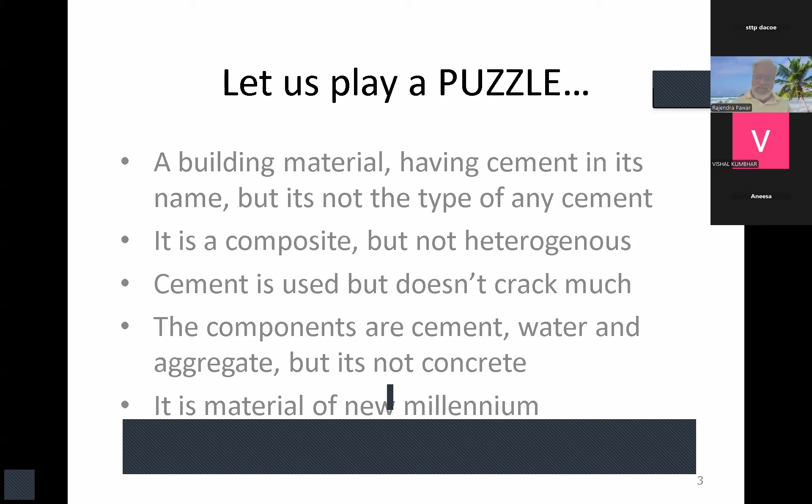The next clue is the components are the same, cement, water, and aggregate, but still it is not a concrete. It's a totally different material than concrete. And of course, this material is now the material of the new millennium, it is said, so the future is in this material. So you must have guessed that it is ferrocement. In fact, the name itself is somewhat misleading. It is not a type of cement, but it is a building material.

Now, in my presentation, I will be covering these topics. We will see first what exactly ferrocement is, its brief introduction, what are its ingredients. Then we will go in detail about the properties and particularly the comparison between the properties of our RCC, which we know well, and the properties and characteristics of this material, and what are the factors governing the designs of such components. Then what are the special features of this ferrocement material? And then with this brief introduction, I'm not going into the design procedures and the details of the other more technical part.

I will be focusing on the general applications. So once you know where it can be applied, then certainly its use will automatically get promoted, and you will come to know how it is more useful than any other building material. So the applications are varied. General applications are, yes, certainly there are major rural applications. Then there is mass scale housing, which is possible by the precasting method using this ferrocement material. Then special structures can be very nicely created using this material.

Then there are different designs and construction techniques like the all-in-one method, which we will try to understand, how it is designed, how it behaves, and how it can be constructed. And lastly, the applications in the public sector, that means in irrigation, in PWD, that means in roads and in canal irrigation structures, everywhere on mass scale, how it can be used economically and very efficiently.

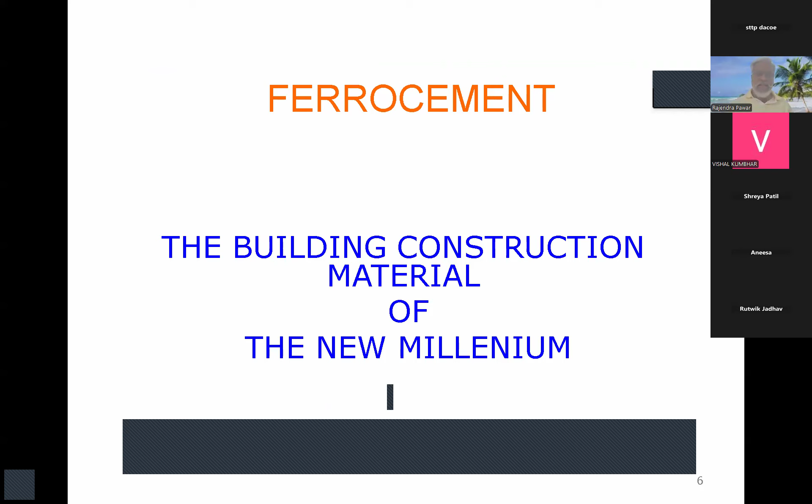Now, what is ferrocement? So, in short, it's a new material, the material of the new millennium, it is said. That means the regular materials we use, the bricks, the wood, the cement, the mud, then the concrete, then many other forms, precasting methods are there. So, apart from all these materials, now this material is gaining popularity, and hence it is used day by day at an increasing scale in the construction industry.

In a nutshell, we will just see what are the features of this ferrocement. Actually, it is not a type of cement. It can be called either ferrocement or ferrocrete. So I think ferrocrete is a proper word, which was coined by our Dr. B.N. Divekar, who is a pioneer in this ferrocement technology. He was a professor in our engineering colleges. Then he resigned, and worked more than 30 years in ferrocement construction, building many big projects in Pune, in Maharashtra, and around India.

And now this technology has so developed in India, particularly in comparison with the other countries in the world, that we are leading in this technology in the world. So, what is this technique? Its technique is similar to reinforced cement concrete, but it is designed using some of its advanced characteristics. You know how the RCC works.

Suppose we take a cross section of a beam, then in the bottom part we put main steel as a member which takes the tension created at the bottom, and the upper part above the axis is taking the compression. So this is how the load is divided into different parts of the section and carried through different materials. And the only strength is in the bond which is created around the periphery of the steel bars by the concrete. So that is the only power we have to design such a member for the given load. So this particular typical characteristic is enhanced in ferrocement. How, we will see later.

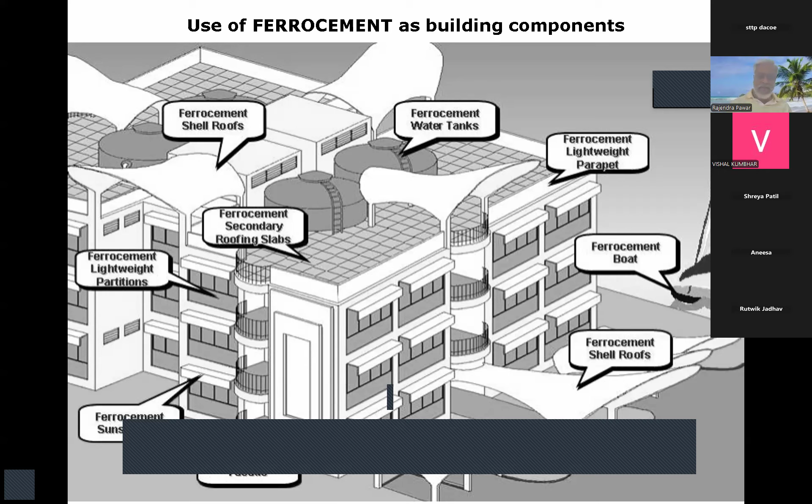Mr. V.D. Joshi from Pune was a pioneer engineer promoting this ferrocement technology, and he first cast ferrocement boats, which are totally unsinkable. You will wonder how they were cast. He made this technology popular. He started constructing these boats in the Pen area near Alibag, and later shifted to Pune and promoted this technology.

See, this is the building. If you want to construct a building of this complicated shape, how difficult it will be to cast using any other material. Think of wood, a fabricated steel structure, even RCC, how difficult it is. But in ferrocement, you can do it very easily and in a very thin section. Even such huge curving walls or roofing slabs can be cast with just 50 mm thickness and without any formwork. That is the beauty of this. We will see how it can be done later. But such beautiful structures can be created using this technology.

What is the material required to form this ferrocement structure? Only 4 basic materials are required: 6 to 8 mm steel bars, which are used as skeletal steel. What is the difference between skeletal steel and structural steel?

I will explain later. The types of meshes can be welded meshes or chicken meshes, which are popularly used, and layers of that on both sides. Then regular ordinary Portland cement and river sand or crushed sand, which is available.

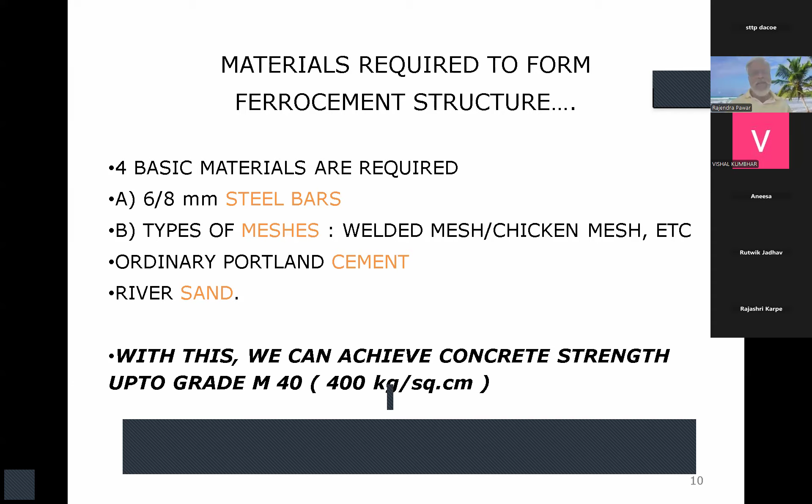With this, we can achieve almost M40 grade concrete having a thin section. And of course, it can take any kind of compression, any kind of tension, certainly more than the limits of standard RCC. Now let us see the materials used for this.

Cement mortar is created, and the water cement ratio is kept very low so that a good quality of mortar can be achieved, and it is simply press filled by hand.

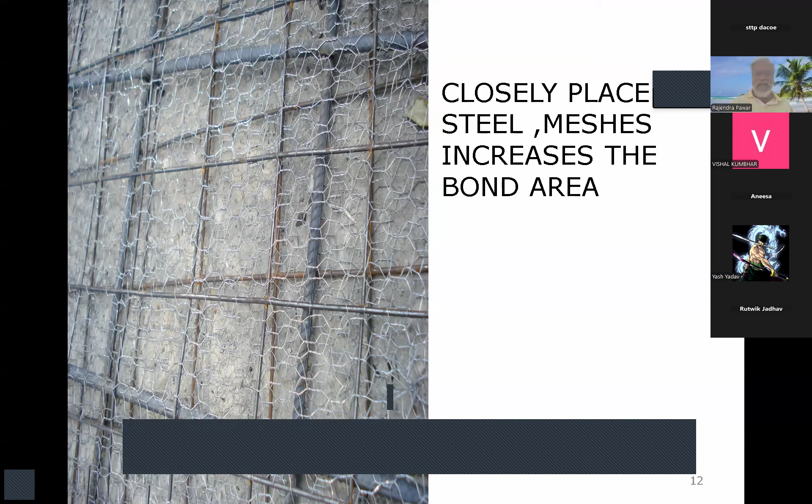This is another picture of closely bound steel and meshes in layers. Depending upon the requirement, we can design it with 2 or 3 layers fitted on both sides of the main skeletal steel and welded meshes. You can clearly see at the bottom the welded meshes other than the skeletal steel.

The load bearing steel is only the welded meshes and chicken meshes, that's all. So the bond area is used only of these meshes and not the skeletal steel, which is only for support.

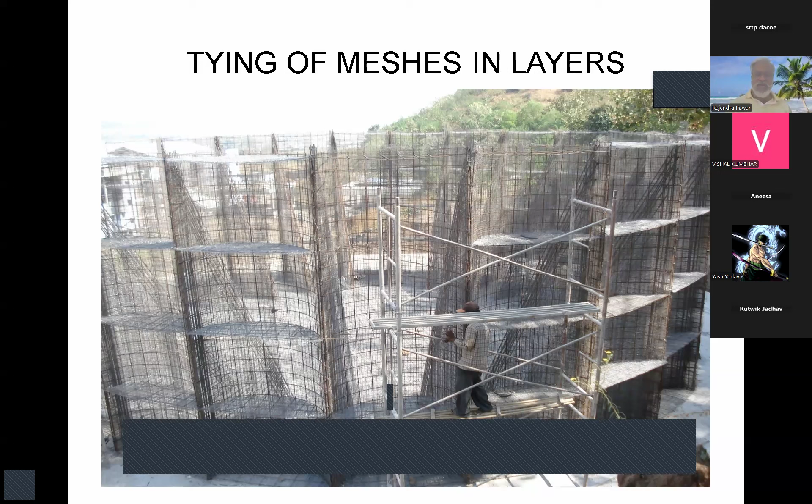Here you can see equal reinforcement is placed in both directions, and this is how it withstands without any formwork. This is another good feature of ferrocement concrete material, that it doesn't require any kind of formwork, no wastage of plywood or wooden or steel planks.

It is directly erected in this fashion using the skeletal steel and cast, or press filled, from both sides of the wall. So this is the way how it is cast.

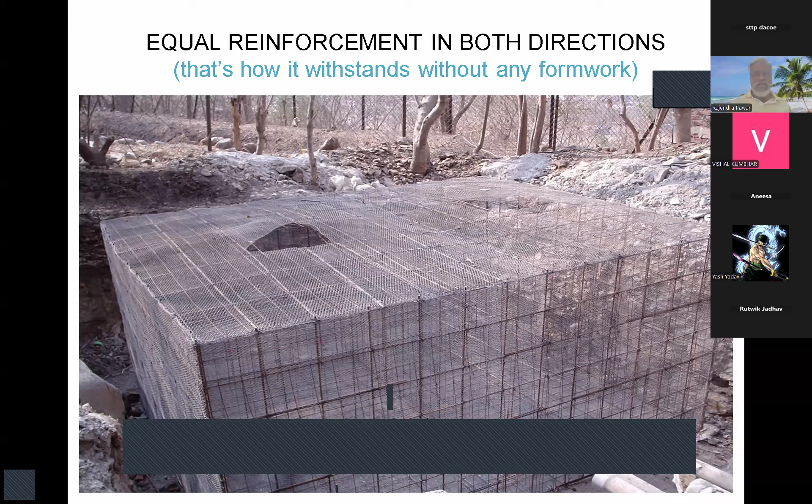You can see this reinforcement binding is in progress. The welding of cages is also done sometimes, and this is how it is pressed from inside as well as from the outside, so a very thin section can be easily cast.

Another thing is why we keep the water cement ratio as low as possible, so that it should sustain this, because with regular concrete we can pour it in a formwork. Here there is no formwork, so if there is a little more water, it will not withstand within the chicken meshes.

So that's why the water cement ratio has to be perfect, and then only it can be press filled and it will withstand in that material. So this is how this material is self quality conscious - we don't need to worry more about the quality because it automatically corrects the water cement ratio, and that's how the material is kept in place.

So this is the kind of press filling method, done for ferrocement. Here the same petals are being casted using this press filling method from inside as well as from outside. At the right bottom corner, you can see half the progress is done and the upper half is yet to be done. Still, you can see no formwork, even no scaffolding is done, except depending upon the requirement to stand the laborers, the arrangement is done. Otherwise, for the structure, no separate arrangement is required.

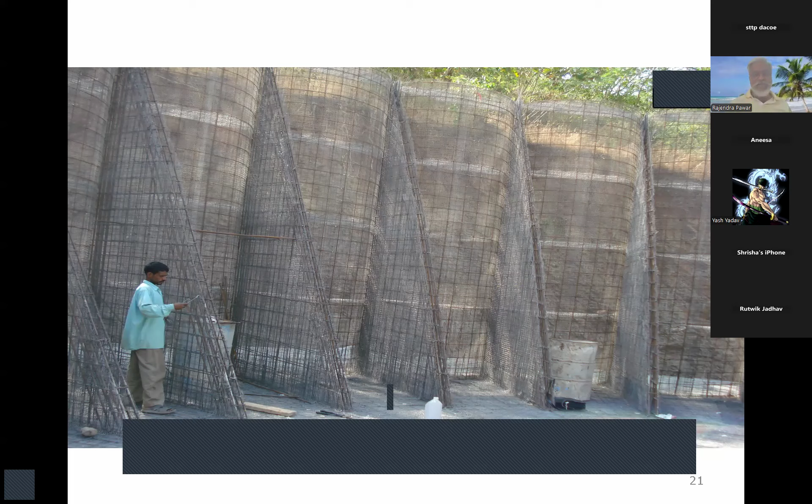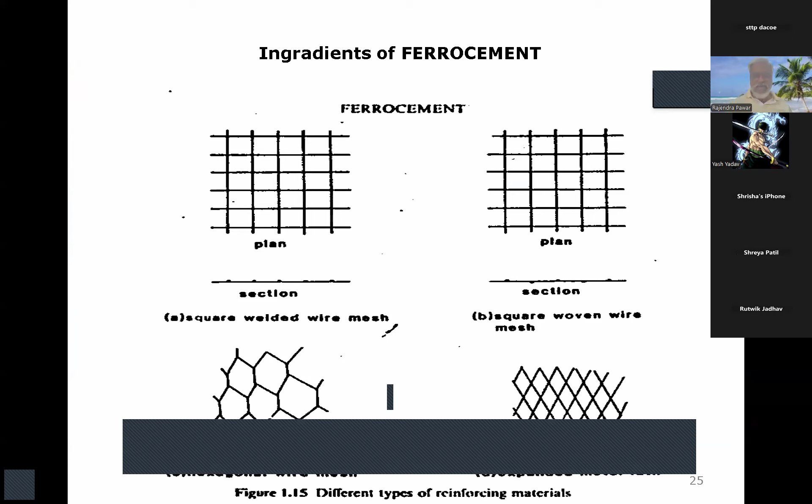Now we'll compare RCC and ferrocement - what are the advantages of this material over RCC? As I already told you, it is not new to us, it's as old as reinforced cement concrete. Though ferrocement material cannot directly replace RCC - I mean, we can construct multi-story buildings in RCC, which is not yet possible in ferrocement technology - it can economically be used at appropriate locations and for specific purposes.

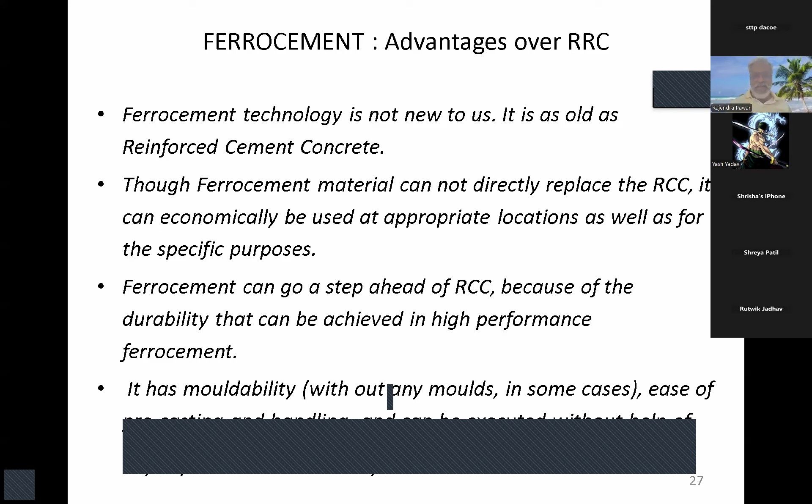So this is the current scenario of this technology. Ferrocement can go a step ahead of RCC because of the durability that can be achieved in high performance ferrocement. And of course, it has moldability, as we have already seen, without any molds in some cases, ease of precasting and handling, and can be executed without help of any skill or technical guidance.

Here is the direct comparison. In RCC, thickness of any component or section shall be minimum 75 to 100 mm - we cannot construct less than this thickness in RCC. Whereas in ferrocement, we can start even from 25 to 30 mm and maximum up to 50 to 60 mm. The matrix here is cement concrete - there is even plum concrete up to 100 or 300 mm boulders used. Here, it's only rich cement mortar without any coarse aggregate.

The reinforcement in RCC is steel bars having diameter more than 6 mm and more spaced apart. But here there is a continuous wire mesh dispersed throughout the surface area of that component in that shape, and that's how it gives strength. The strength can also be achieved through shapes, giving shape to the component, and it saves material cost. The strength to water cement ratio, strength to weight ratio is very low in RCC - here it is very high. For casting, centering and formwork is essential in RCC, due to which honeycombing is possible. Here there is no formwork and centering - the tightly tied wires act as formwork, and hence dense and compact filling is possible.

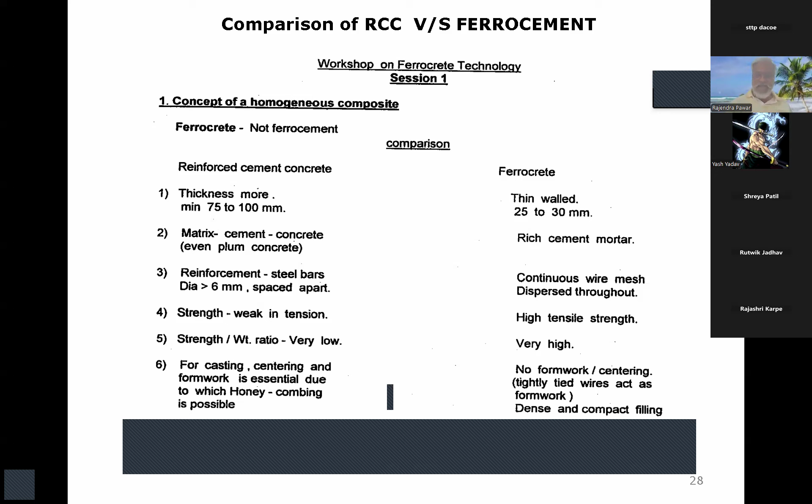So this is how the tensile strength as well as compressive strength is increased in ferrocement, only because of the even distribution of the steel reinforcement.

Some features: it is a thin wall reinforced concrete, constructed using hydraulic cement mortar without coarse aggregate. It has a very high tensile strength to weight ratio and superior cracking behavior compared to conventional reinforced concrete.

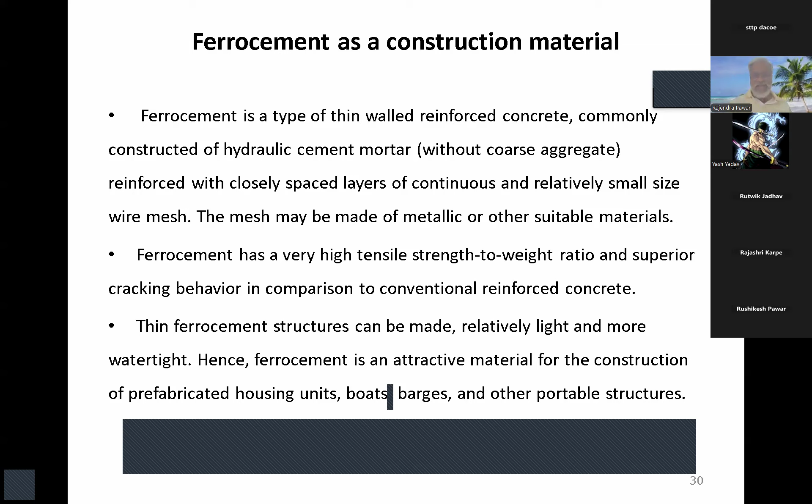Very thin structures can be made. We have seen some pictures - relatively light, more watertight, and of any size and shape. We will see more pictures later when we cover applications.

These are the general advantages of ferrocement. It's very labor intensive, which can provide work to many people, particularly in rural areas, and they can start their own business also using this technology and learning it in just a few days.

It's very economic, with fabrication mainly from locally available material. It has high structural strength, is easy to construct, and easy to transport if precast.

Another point is that it's more seismic proof than RCC. Because the beauty is, when you construct an entire structure like a room or small building in ferrocement,

the homogeneity is more, and that's how the structure as a whole behaves. During earthquakes, it has a little flexibility too because of the thin sections.

The RCC is more rigid than this ferrocement material. That's why beyond the limit it easily gets cracked.

But here, due to the flexibility, even in higher earthquakes it withstands by slight movements, allowing some movement, and the durability is greater. So this is another feature of ferrocement.

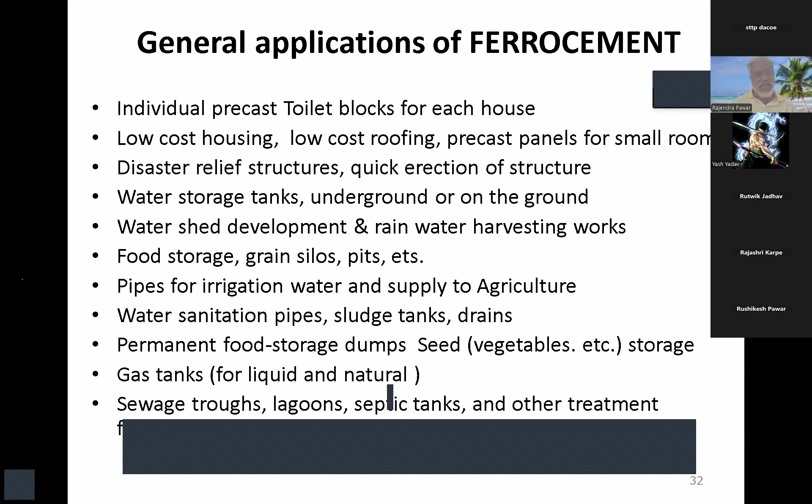Pipes for irrigation water, replacing the canal system, is also possible with this. Or existing canals can be lined with a very thin section of ferrocement, increasing the life of those canals. Many such advantages exist.

We see the actual applications and photographs of this - rainwater guttering, greenhouse components, cattle feeders and water troughs, pavements in villages and even in urban cities. All the pavements alongside roads can be done using precast units.

The telephone and power poles, the signboards, those can be constructed in this. Many such applications are there. Even the use is increasing in the defense area. The bulletproof or even the shell-proof huts or the precast panels can be constructed.

We have tested such kind of components in our MIT at Pune, and successfully we have given this design to the defense area, and they have casted many bunkers, that kind of thing, at the borders. And all these structures are very bulletproof and even shell-proof. So many common applications are there. You can guess or you can even think of.

There are various rural applications, urban applications, the sloping roofs, the domes. The domes are the easiest way to cast in ferrocement technology only. Big domes like 40 feet, 50 feet have been casted in Pune city, to the big atriums having 8 to 10 meters in height, without any formal centering and almost at one-third cost. So this is the beauty of this material if compared with the conventional RCC.

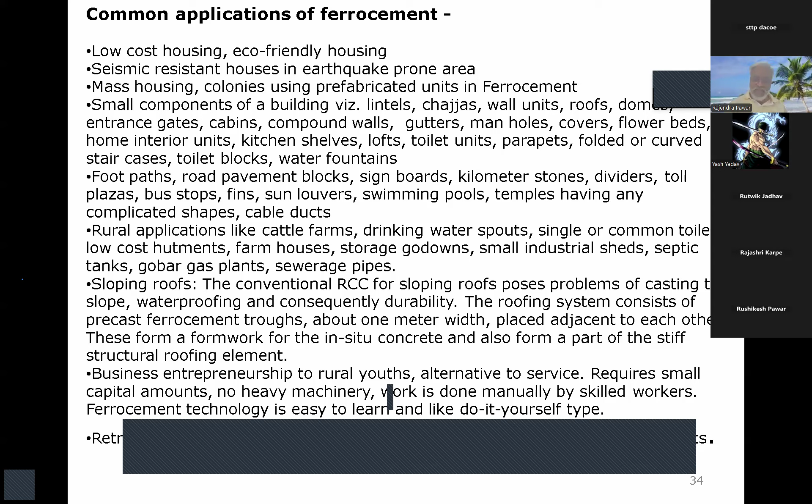The electric poles, signposts, tree guards, biogas plants, barricades, so many applications are there, even in rural areas, where those small components can be casted by the farmers themselves. We can provide some technology to them, some help, and then it is made applicable like this.

So thousands of such tanks have already been casted in the Konkan area. One NGO, Jalvardhini Pratishthan, is working in that area. And those are very useful for small farm holders, for horticulture, and even for other agriculture purposes.

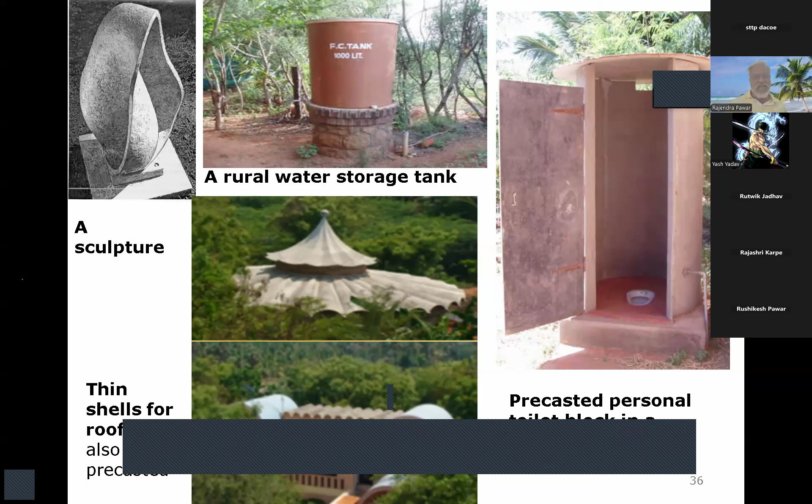Here to the left, a beautiful sculpture is there. So any such intricate shapes, thin shapes can easily be casted in this. And here at the center, you can see the thin shells of roofing, which can also be precasted. Beautiful designs can be created.

So by jacketing it in ferrocement walls, these structures can easily be strengthened and the life can be enhanced using these retrofitting techniques. And for this, the material is unique now for the RC structure. So just name any shape and ferrocement gives it to you.

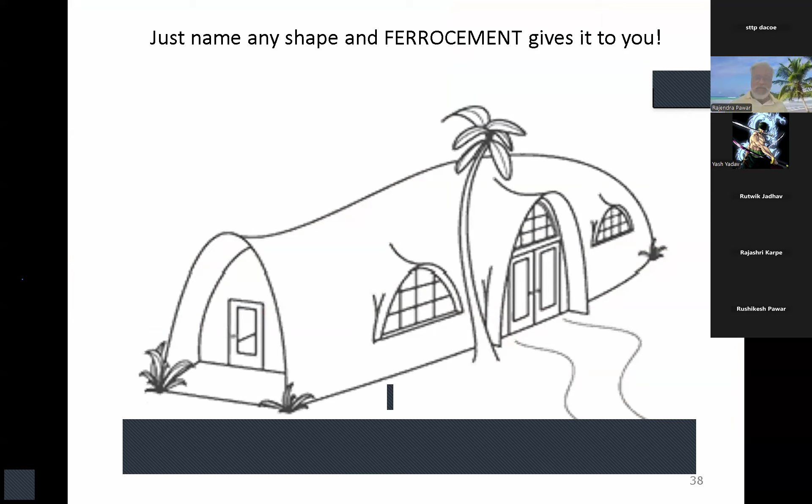I think you understood at least a little bit what kind of material this is, the different characteristics it possesses, and where the applications can be. Some features of these parameters governing the design we will just see in a nutshell.

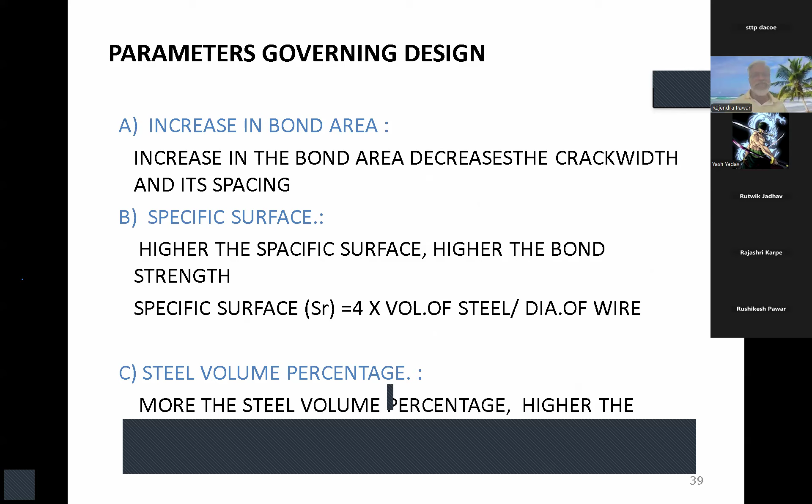Increase in bond area, that's how there is a decrease in the crack width and its spacing. The higher the specific surface, the higher the bond strength. Steel volume percentage is also higher. That's why the tensile strength increases. So these are the parameters which govern the design of these ferrocement structures. The regular post crack stress method and the ultimate stress method are used for designing these ferrocement components.

We have seen the reinforcement pattern is changed, how it is different than the RCC, and hence it changes the structural properties also, and the material becomes more homogeneous when compared with RCC. The bond area increases and its crack resistance. We have seen all these things.

Cement consumption, if you compare, in ferrocement it is certainly more than the RCC. It ranges from 500 to 750 kg per cubic meter, while in RCC it is between 100 to 300 kg. Use of fly ash is advantageous in ferrocement also.

The steel reinforcement is basically wire mesh having 0.5 millimeter to 2.5 millimeter thicknesses with consumption of 350 to 500 kg per cubic meter, while in RCC the diameter is between 6 to 40 mm and the consumption is 90 to 160. The cover to the reinforcement is 2.5 to 5 millimeter in ferrocement. Now, this is another advantage. While in case of RCC, it has to be minimum 12 to 40 millimeter.

No coarse aggregate is used, and the reduction of the dead weight is also another advantage. And even on shallow foundations or the foundations having low bearing capacities, these structures can easily be constructed. Even in Pune, for example, as I mentioned, Dr. Divekar's own bungalow in Pune was a single-storied load-bearing structure built almost 50 years back. Now he has constructed 2 stories above that bungalow, totally in ferrocement, by adding only 1/3 of the weight on each floor. So this is how very innovative designs can be done, and the construction can be done.

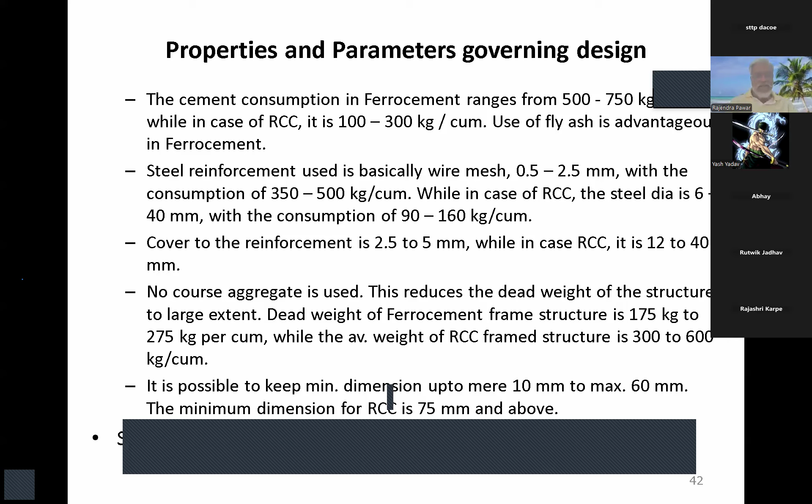It's possible to keep minimum dimensions. That's why we can get any shape, as we have already seen. We will just learn the characteristics of the ferrocement: no timber plank, no formwork. That's how there is saving in cost and saving in time.

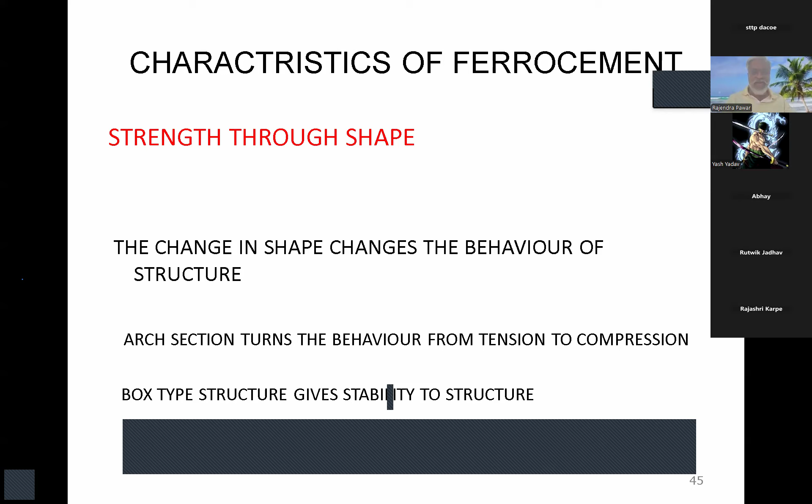The strength through shape can also be achieved, like the plates and shells. We know that's a different part of designing. The arch sections, the arches, turn the behavior from tension to compression. So that facility can also be utilized while designing the ferrocement structures. The box type structures give more stability to the structure. That is all in one method. We will see some slides later.

These are the characteristics which I have already explained. So I think we will go to the application part directly. This is a simple construction technique. Only 4 materials, 3 skills and 3 stages. The stages are regular: the welder for welding, the tier for binding the meshes, and the mason for casting manually by the press filled method. This is a self quality conscious material. I already told you. High strength to weight ratio. So this leads to a lightweight structure.

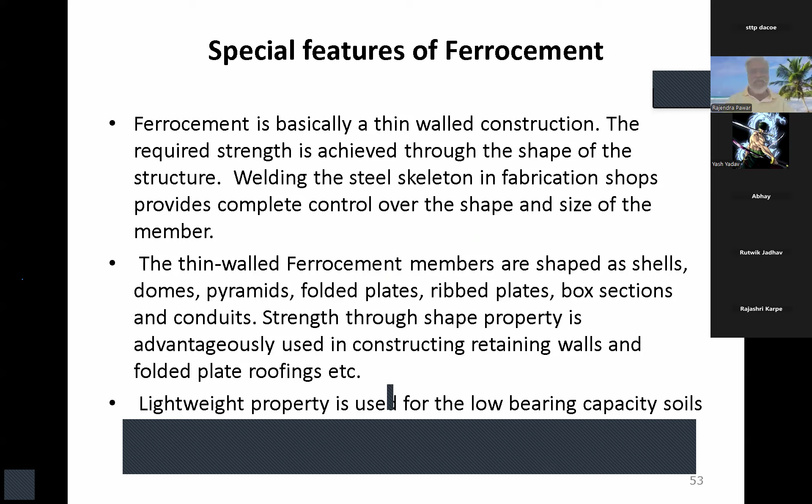Now we will see some special features of ferrocement. The shells, domes, pyramids, folded plates, ribbed plates, all these special members are very difficult to cast in RCC or even using any other material. But ferrocement is the best suitable material for such structures. The other characteristics we have already seen: no centering and formwork is required. Big and costly machinery is also not required.

And this offers liberty to the architects in imagining beautifully shaped structures. See, while thinking of RCC or any other material, there are restrictions or constraints to the architects for giving the different shapes. But here, he gets more liberty for planning. Now we will switch to the applications, and in the given time, we will rush through the various slides so that you can get a better idea.

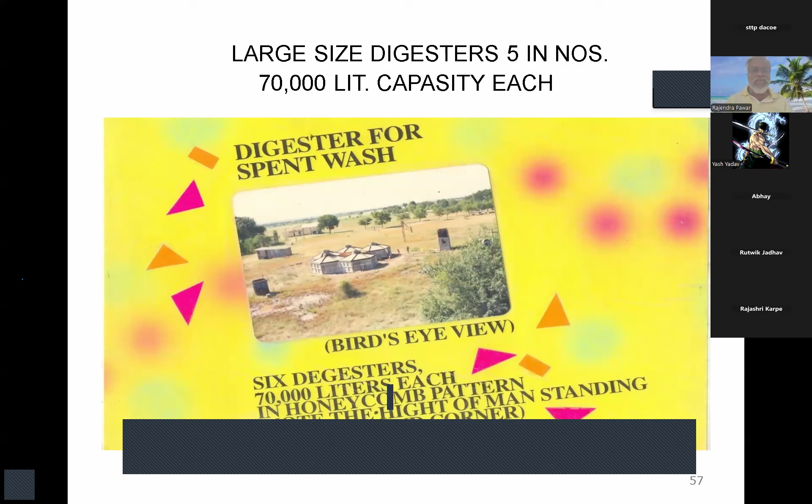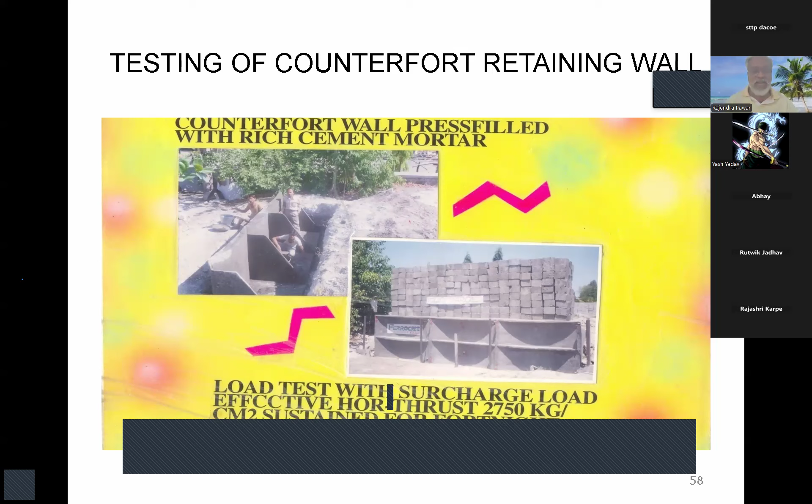The load test is carried out by giving the load almost to 3000 kg per square centimeter by putting the blocks over that. That way side pressure was created and it was successfully passed. So such kind of counterfort retaining walls can easily be constructed at very low cost using ferrocement technology.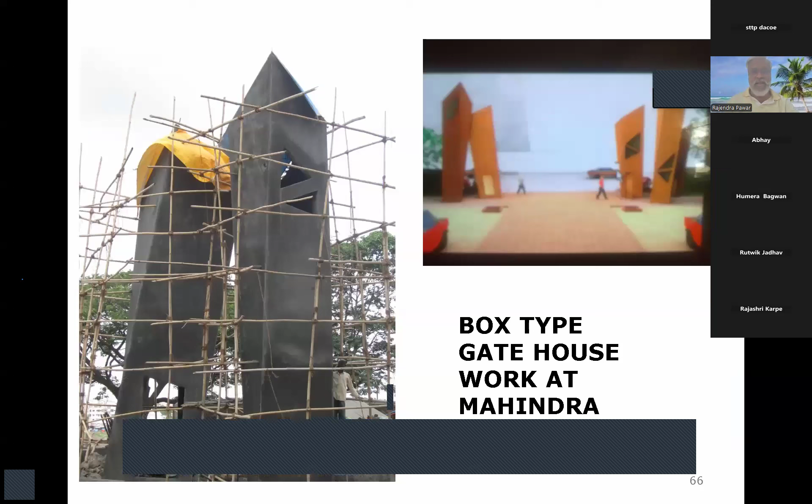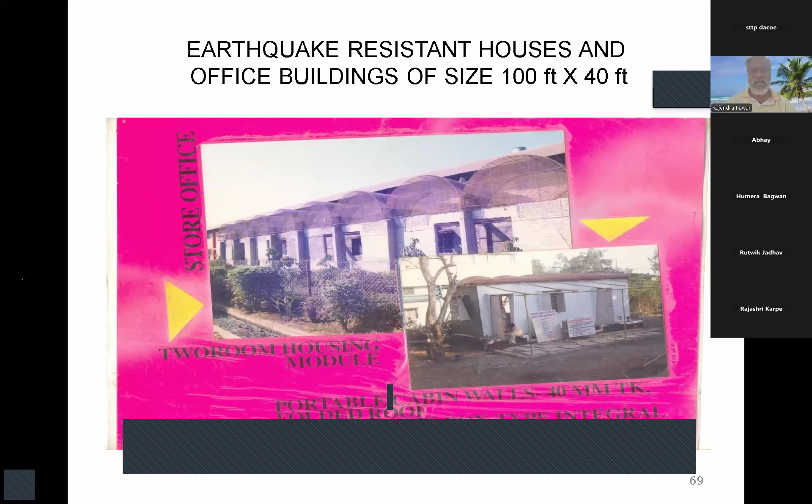Here is a society of earthquake resistant houses and office buildings of size 100 feet by 40 feet. They have been constructed in the Konkan area. These are different constructions. See, the beautiful domes have been cast in Ghaziabad, in North India, where we have visited these sites. Beautiful structures have been cast in ferrocement almost 30 to 40 years back.

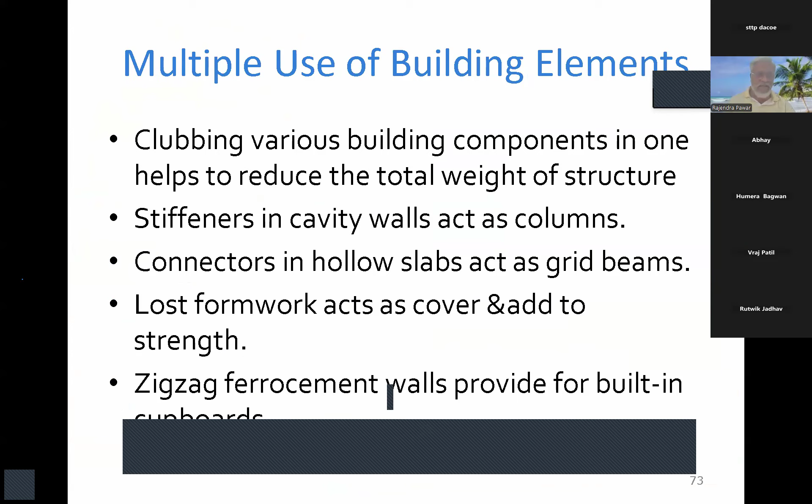Again, these are some multiple uses of building elements. Those elements can be utilized in any RCC building, any high-rise building, or skyscrapers. Shaping a member is also to reduce weight. And these are again the same advantages which we have already discussed.

Now we'll see how this technique can be used for mass scale housing. We need a number of houses as the population is growing and the demand is more. So using the conventional methods, we cannot fulfill the demands due to the time consuming methods, the labor intensive works, and maximum site work. The solution can be precasting, erecting, and joining at site. But again, while precasting in RCC or prestressed concrete, the problems are heavy weight and the jointing at site.

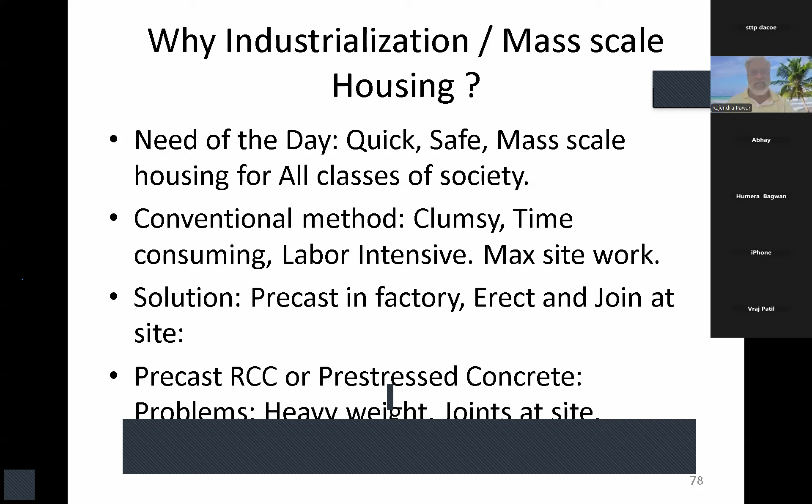So, to overcome this, the same thing can be done in ferrocement components, and we can increase the speed of erection of the houses, and that's how mass housing can be possible in minimum time and with lesser costs. So, these are some advantages. We have already discussed all these.

There is another advantage of this ferrocement element as lost form. In RCC, if you want to cast a long beam kind of structure or even the column, we create a formwork of plywood or steel plates, then we pour concrete in that and we remove the plates. Here, the same plates can be cast in ferrocement and regular RCC is cast, and then the formwork is left as it is as a lost form.

So that will become a component of that member, a composite material, the outer side ferrocement material, and the inner side regular RCC. So these kind of structures can also be cast in multi-story buildings and high-rise buildings.

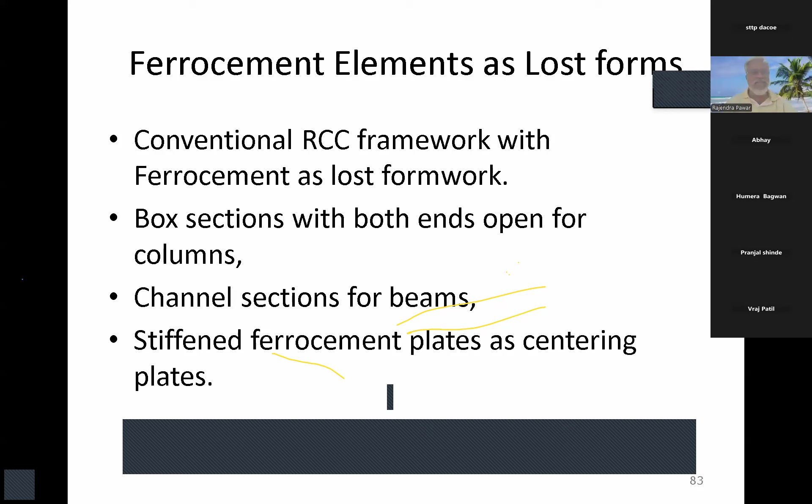Now we will see various applications. There can be applications in almost various areas and sectors. Water retaining structures, as I told you it is a very good waterproof material. Soil retaining structures also, space structures, special feature structures, elevation treatments, and of course precasting. Now in water retaining structures, these are the various applications. We will see the pictures of that.

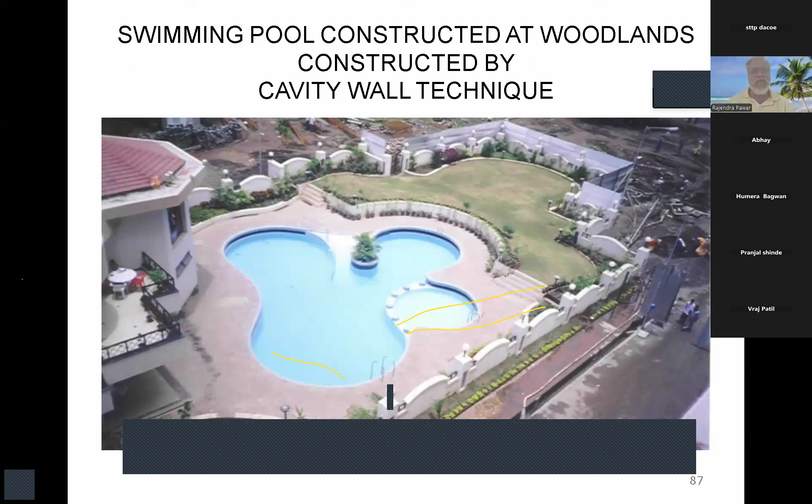A beautiful swimming pool cast in Woodlands, which is at Lonavala. Here at Mahindra Royale, some swimming pools in Pune residential societies. A big water tank of 12 lakh liters capacity, which is at Talegaon. The pictures we have already seen. The soil retaining structures, we have seen the retaining structure having almost 6 meters in height.

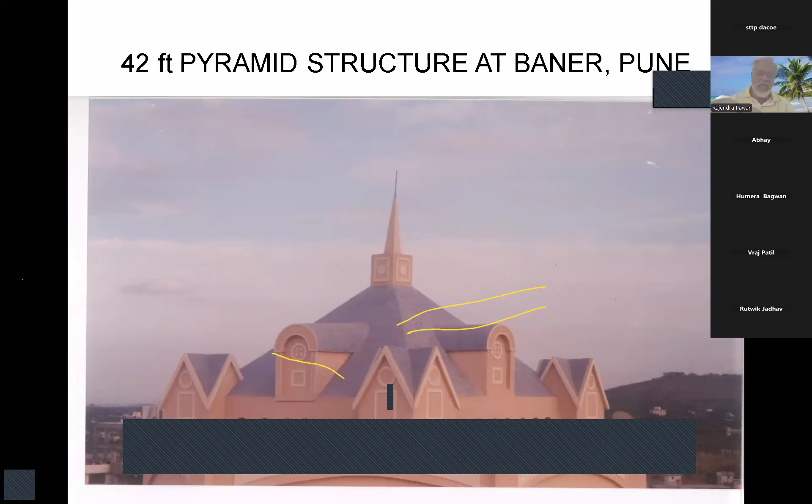And these space structures like domes, shells, and pyramids can easily be constructed. See, these beautiful shapes can be achieved in ferrocement. The building is an RCC high-rise building, but the rooftop is beautifully decorated using these ferrocement elements.

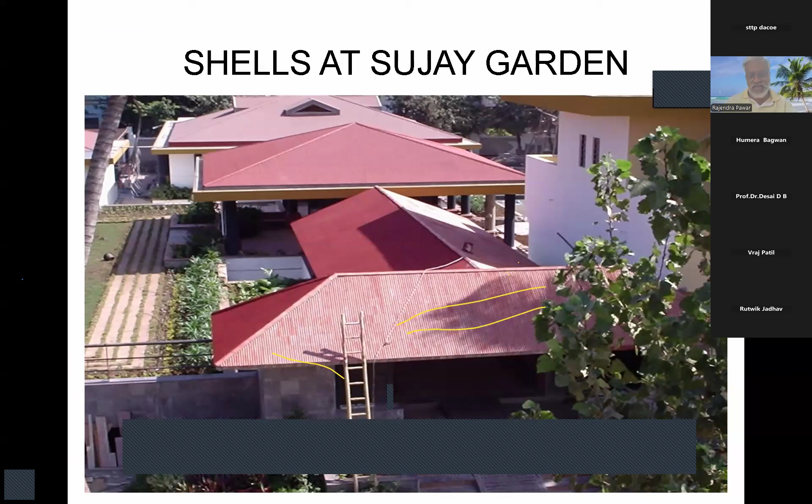Here in Kothrud area, there is one society and a big Nala passes through the society. You can see the residential buildings to the sides. This Nala was assessed, the discharge was calculated, and the in situ pipe of different shape, not circular, a conduit you can say, having a length of 700 feet and the diameter almost 12 foot, the maximum diameter.

It was casted and kept in place, and the land was made to the other uses like gardening and other things, and the Nala was confined and passed through this in situ conduit. So this structure solved the typical problem of that Nala, the flooding and waterlogging problems in that residential area.

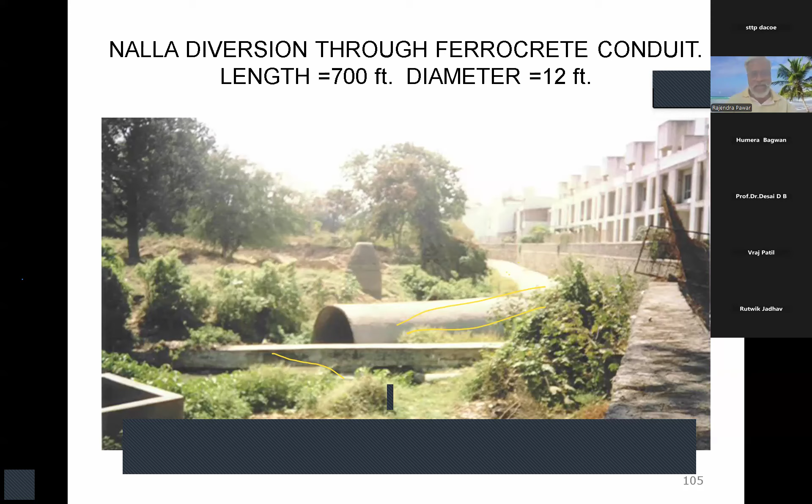I told you about Mr. Joshi, who started this technology by constructing the boats. Such kind of catamarans are still in use, cast almost 40, 50 years before, and they are still floating. These are totally unsinkable, and you can see the material itself is watertight. That's how its durability gets increased.

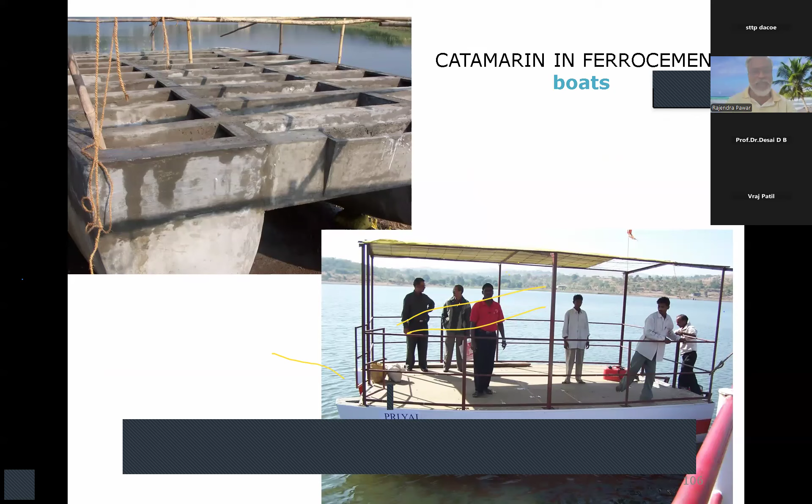Here, the various applications: you can see the elevation treatments can be given even to the tall buildings, the fascias, hollow columns, hollow beams, the pergolas, the arches, waterfalls. So any architectural features can easily be done in this ferrocement.

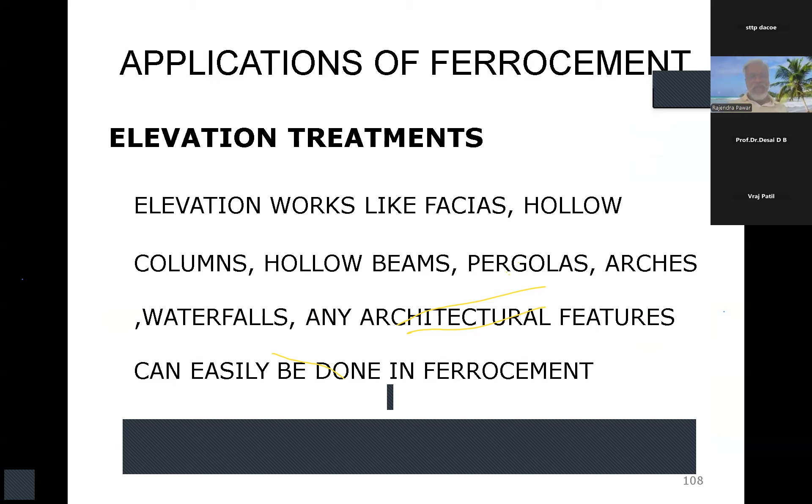See the beautiful roofs, the fascias, the columns at the entrance of a big resort. This entire structure is casted in ferrocement. The columns are hollow columns having a thickness of only 2 inches.

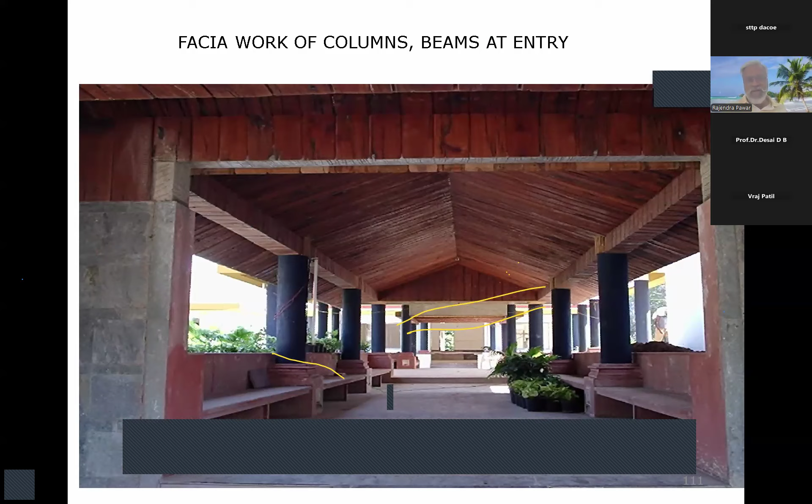Now we can see the special features, how those can be casted using ferrocement. The special features, the structures like unconventional structures. We have seen the Nala diversion project, the large size silos, different shapes of watchman cabins, containers. Garden features and furniture are also possible in this technology.

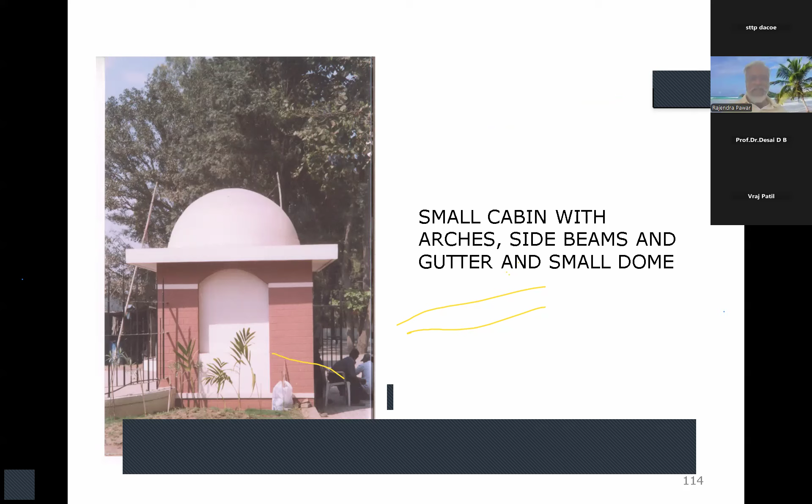This is a beautiful small cabin having arches, side beams, gutters, and a small dome, casted in Ahmedabad almost 50 years before. This is the first structure for testing purposes. As a model, it was casted there for the promotion of this technology, and it is still in a beautiful condition.

Can you cast such kind of ball in RCC very nicely and smoothly? Think how the reinforcement would have been placed, or how it had been casted, and think of casting this in RCC as well as in ferrocement. Can anybody guess how the steel reinforcement would have been placed inside this?

Anybody from students? Hello? Yes, sir. Can anybody tell how the reinforcement in this ball would have been placed, if you want to cast in RCC or in ferrocement? Peripheral. Peripheral reinforcement. Okay. And now we will see the actual casting, how it is done.

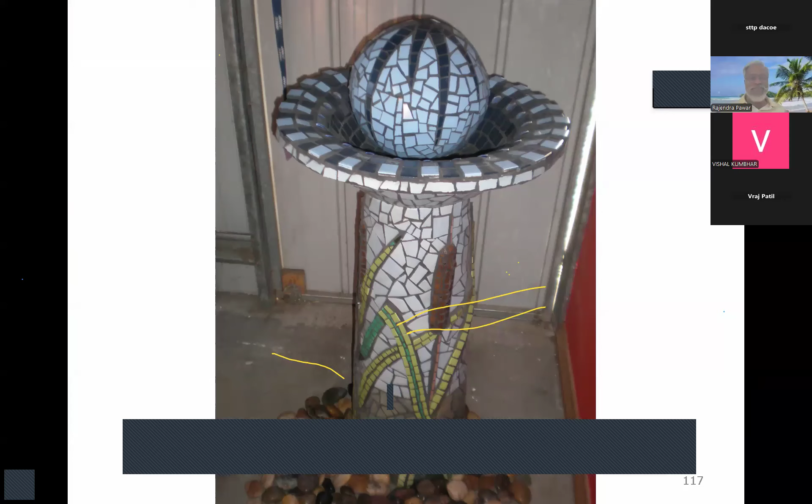Only a mesh covered up onto a football. Right, pure football. Exactly. So very easily this can be casted. And such beautiful steps, these flower pots, the balls, again decorated by pieces of tiles. So such innovative structures can be casted in ferrocement.

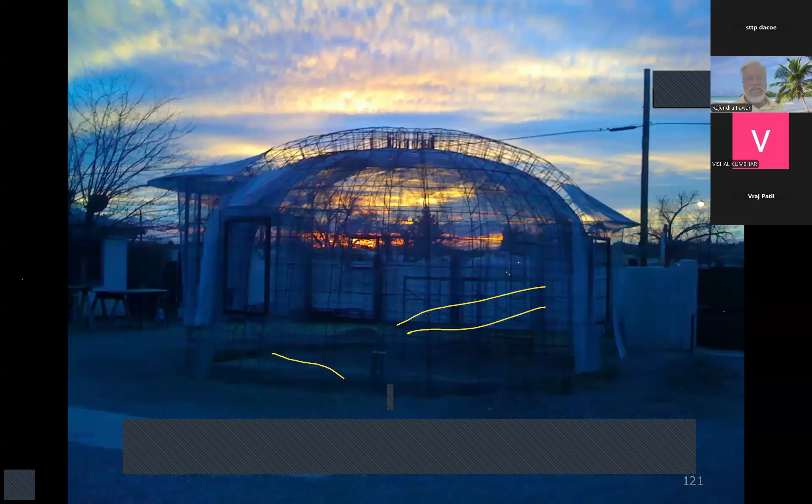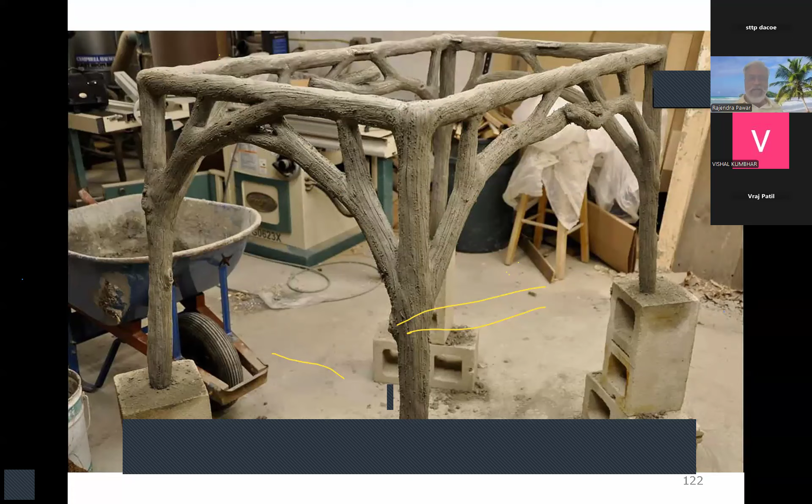This is the skeleton of the same table which you have seen in the previous slides. Beautiful garden furniture can also be created using this technology, which is of course durable, strong, everlasting, and with minimum cost.

Such structures can also be cast. A beautiful dome, almost you can see that 31 cubic foot of cement mortar is used. The welded mesh layers are given from both the sides. It's expanded metal lath which is used for this structure.

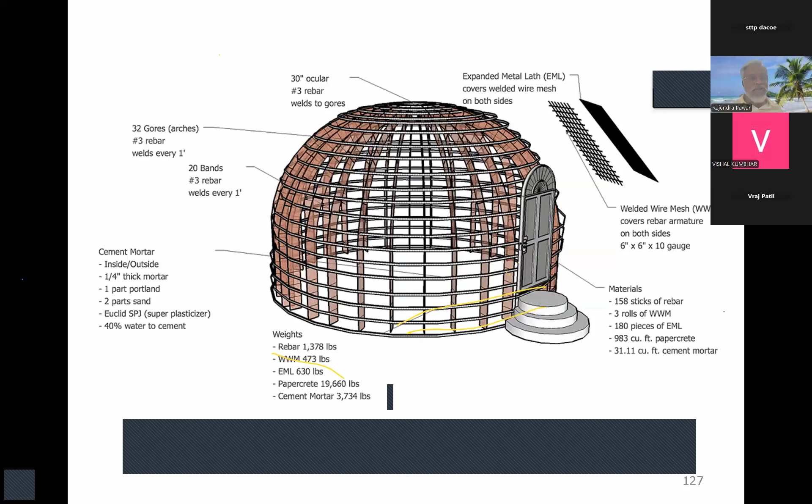The arch form is given so that the entire structure is in compression, and that's how the requirement of steel as well as concrete is reduced, and a sturdy structure has been designed and then cast. It was a 40% water to cement ratio, and it is only 1/4 inch thick mortar used for this dome.

This is another picture. Now we will see a different kind of construction method, which is designed and patented by Dr. B.N. Divekar, the all-in-one method. Let's try to understand the design concept of this all-in-one method of construction. In conventional methods, many activities are involved.

We can see the RCC framework for the footings, columns, beams, slabs. First, we have to prepare the formwork, then provide steel reinforcement, then pour concrete, and then de-shuttering of formwork. While doing brickwork, we have to do handling and stacking of bricks, the line out for brickwork, then providing brickwork, constructing, and then providing window sills and other things.

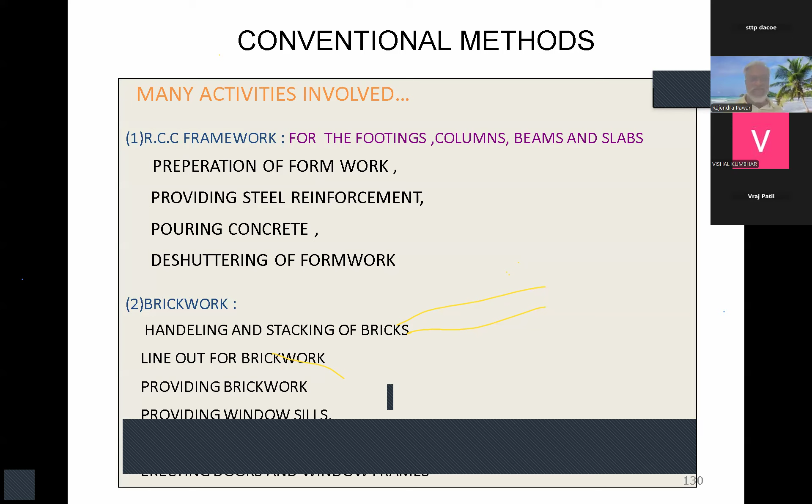Then we have to do finishing, the plastering from inside and outside. Different materials are used like brick, steel framework of doors and windows, plaster, mortar, RCC and concrete. And to all these, the waterproofing in case of the roofs, the preparation of base, then laying of tukda bricks, the koba we call it, applying cement mortar over it, and the finishing of top surface. So all these processes need to be done in conventional methods while casting in RCC.

Now here is the process involved in the all-in-one method of ferrocement construction. Divide the walls in panels and slabs in various boxes. The design of slab and design of wall is exactly the same. There is no difference. The small panels are created in form of boxes, say 1 to 1.5 meter square boxes, and erection of fabricated walls and slabs at site.

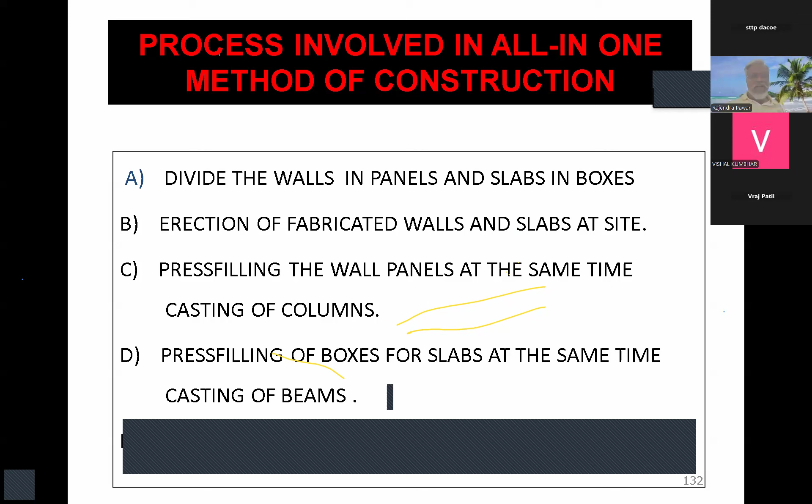Then we have to press fill these wall panels, at the same time casting the columns. The columns are built in, so those are not visible here. The same is the case with roofs, where the beams are hidden. Those are also built in and cast at the same time as the slabs. So this is how it is used in the all-in-one method.

If you compare the basic difference, in RCC, the framework comes first and filler walls later. We erect the RCC framework first, columns and beams and slabs, and then we construct the divide walls as filler walls later. As different materials are used, the construction is heterogeneous. So that's how it gets cracked between the surface of any column or beam and the brick wall, because of the difference in material.

It's certainly heavy in weight, uneven load distribution, all work needs to be done at site, and it's time consuming. If you compare here, the process is completely reversed. The same material is used for construction of walls, floors, and framework. In a nutshell, it is light in weight. The load is uniformly distributed. The site work gets reduced by at least 10%, and it's certainly a time and cost saving process.

Now, how is it done? We will see some differences first. In RCC again, we need special design for earthquake resistance, it is restricted to buildings only, with maximum pollution and maximum use of natural resources. Here it is eliminated. The system itself is ideal for earthquake resistance because of this box action. It is more durable and sturdy, suitable for all branches of civil engineering, and it is 100% eco-friendly since there is no use of any wood or other natural material.

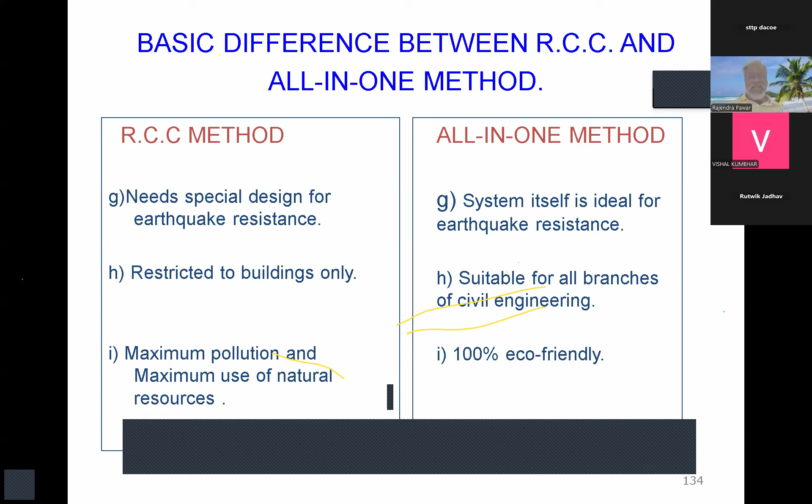This is how it is designed. This is a wall panel. It's a cavity wall, and the different panels have been designed. In each panel, these are the hidden columns and beams in the same panel. Those are cast along with the wall panels.

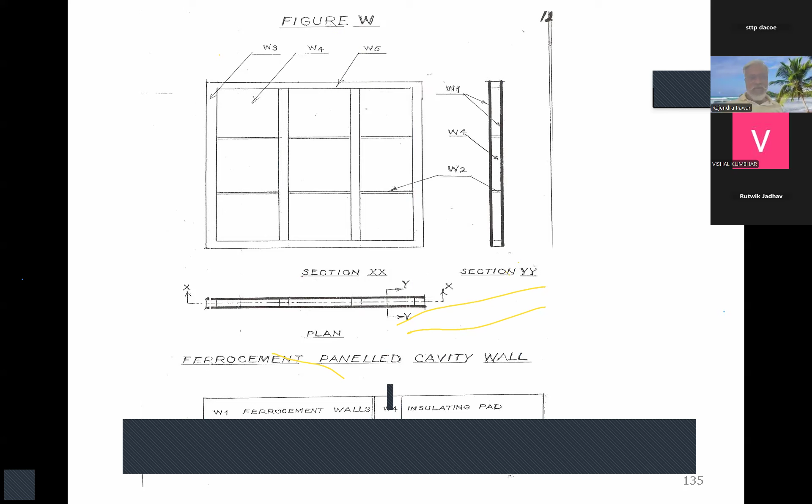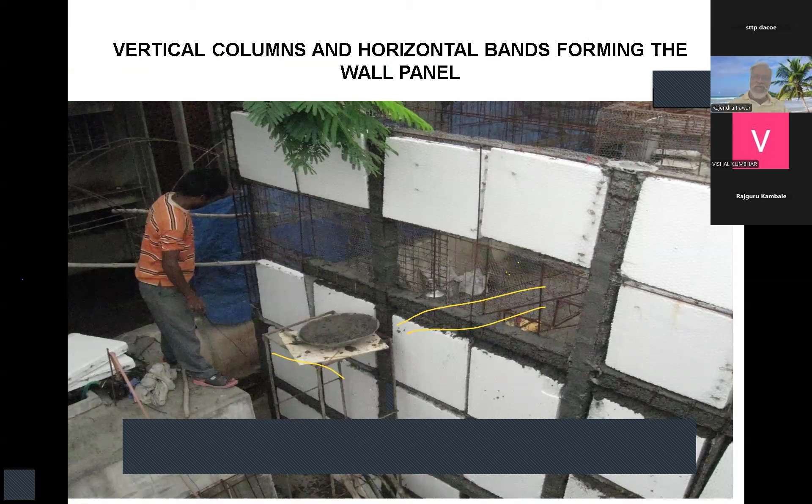The casting is started from the top. Once you erect all the skeletal and steel structure for any building, the casting is done from the top, and then the walls are finished.

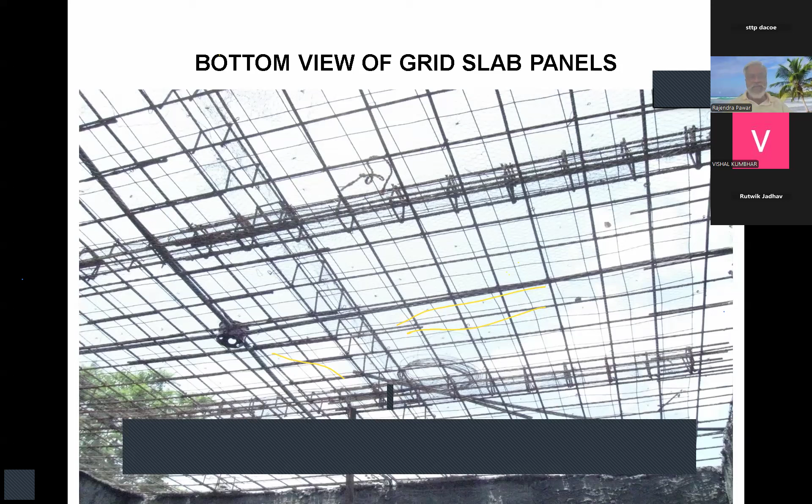This is the bottom view of the same grid. Here you can see the structural steel, the wire meshes, and the hidden beams, which are placed and then cast simultaneously. Here these beams have been casted, and beyond, immediately followed by the slab which is press filled using hands. This is the casting of slab panels from the top, and then you can do the waterproofing layer above this, and the slab is finished.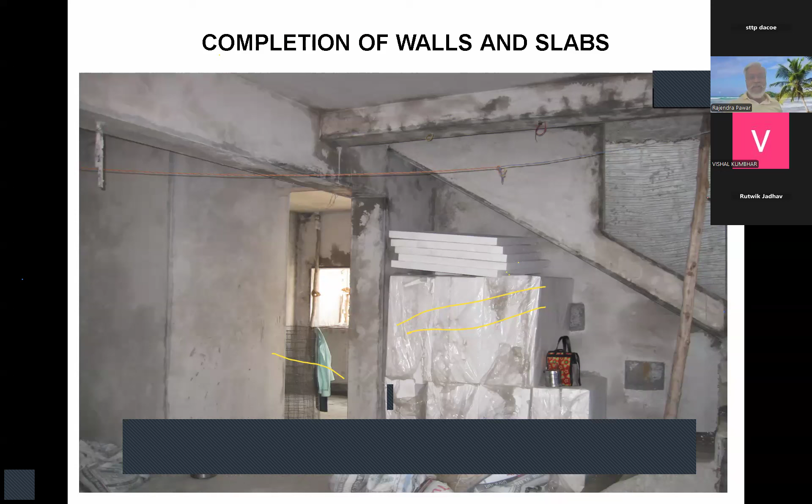Some salient features of this all-in-one method: the load distribution is throughout the body of the structure due to paneling, boxing, and 3D framework. The members like columns, beams, and walls are reduced and built in, giving more homogeneity. The integral casting structure acts as a single unit, as a box, which enhances load carrying capacity.

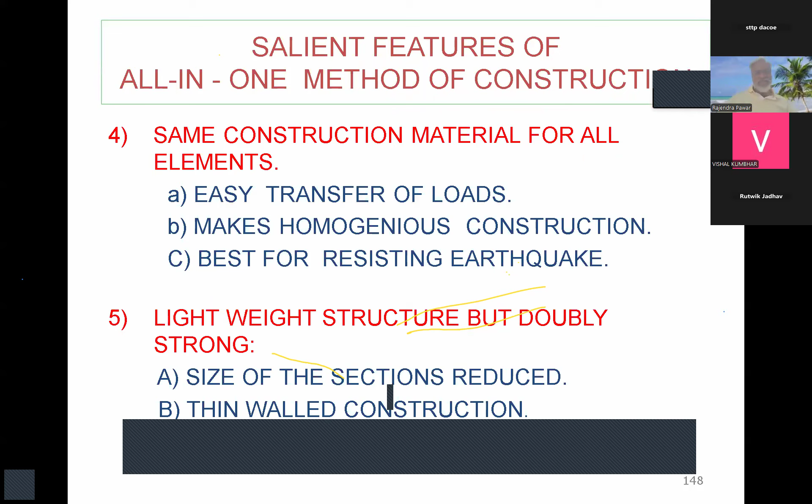Same construction material is used for all elements. There is no difference, no brick work or wood work is required. Everywhere only cement mortar and wire meshes are used, which is very easy to procure and cast. There are many such other advantages.

Now, in a few minutes, we will see how these applications can be done in the public sector on a mass scale. Government departments like water resources, rural development, agriculture, water supply, and public works departments can make use of this technology for their various structures and directly replace RCC with this technology. Many intricate and novel designs or shapes can easily be constructed, and on mass scale, there is a huge cost reduction and also possibility of precasting, so we can increase the speed of construction.

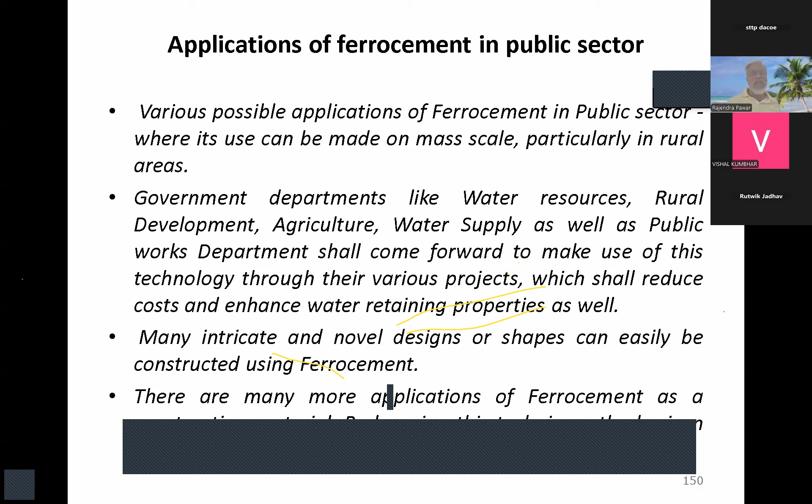In the water resource department, waterproofing is the basic requirement. So leakages through the body of dams and canals, the seepages, can be tapped or stopped by using this technology as retrofitting. The ornamental and attractive shapes for dam entrance gates and various cabins on dam tops can be used. Small Kolhapur type bandharas and retaining walls can also be constructed here.

The canal lengths run into thousands of kilometers. Precast cement panels can be used for lining such canals, saving huge amounts of water. For small field channels, precast trapezoidal gutters of small lengths can be made portable, and even for drains, this technology can be used on a mass scale with reduction in costs.

This is the ferrocement lining done for a swimming pool. The tank size was almost 40 by 20 feet, and the depth was almost 6 feet 9 inches. The location is near Lonavala.

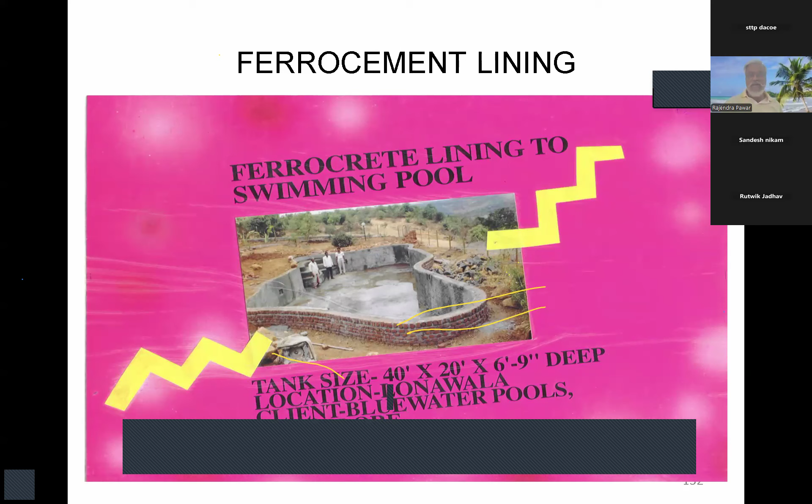This is one ferrocement application I did as a pilot project in the water resource department when I was at Buldana. This is a pump house building for a huge lift irrigation scheme. The pump house size is almost 20 by 8 meters, and the roof is 9 meters high, because girders and a gantry are required to lift the big turbines and pumps for maintenance and repair work. So this height is required.

The structure was erected in RCC and only the roof remained. So I replaced that roof. There was a discussion on whether to do a slab for this 20 by 8 meter size at 9 meter height, or just cover it with a steel framework fabrication. I replaced that with a semicircular ferrocement roof, a design I constructed there, at just one-third of the cost estimated for the RCC work.

Later we made improvements, and instead of a single semicircular arch in one direction, multiple arches were designed for another pump house, giving further savings in cost and increased speed of construction. This was done way back in 2011, so now almost 12 years have passed, and the structure is still standing beautifully.

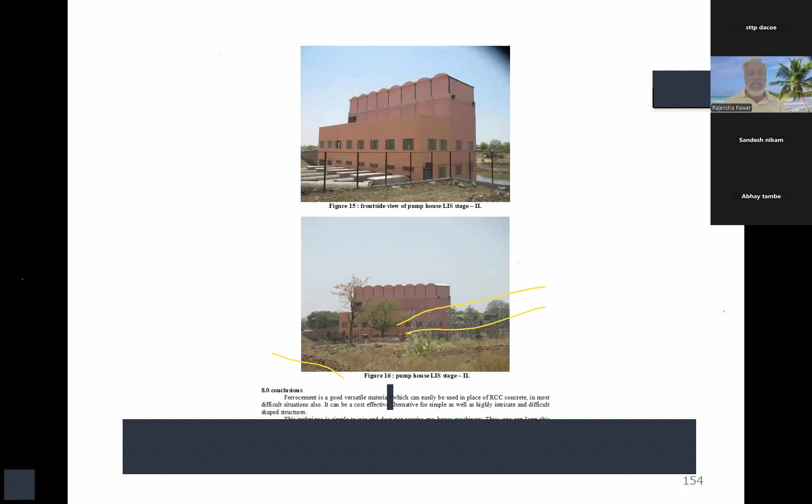Here, the single small curvature segment skeleton is bound on the banks and those are put together. Just a foundation is prepared, and the segments are nut-bolted to the foundation, simply press-filled on site, and within 2 to 3 days this bandara can be completed. This one was almost 60 to 70 meters in length, 1.5 meters in height, and cost less than 1 lakh, where a traditional RCC bandara costs around 8 to 10 lakhs. This design is very beautiful and very popular in the Marathwada region for cement bandaras.

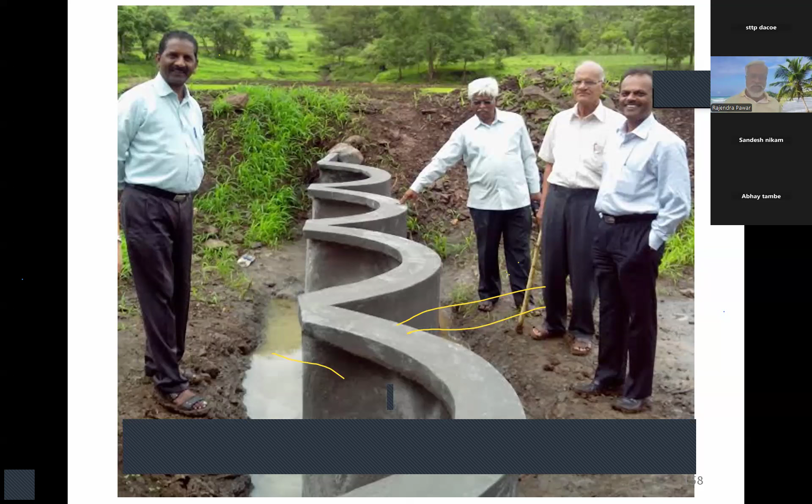Such a chain of bandaras can be cast on any stream or big nala, where we can store water and let it seep to recharge the groundwater, for water conservation purposes.

In public works departments, you can see many such applications. I will not read all these details, but you can understand and think of the various applications there are in ferrocement.

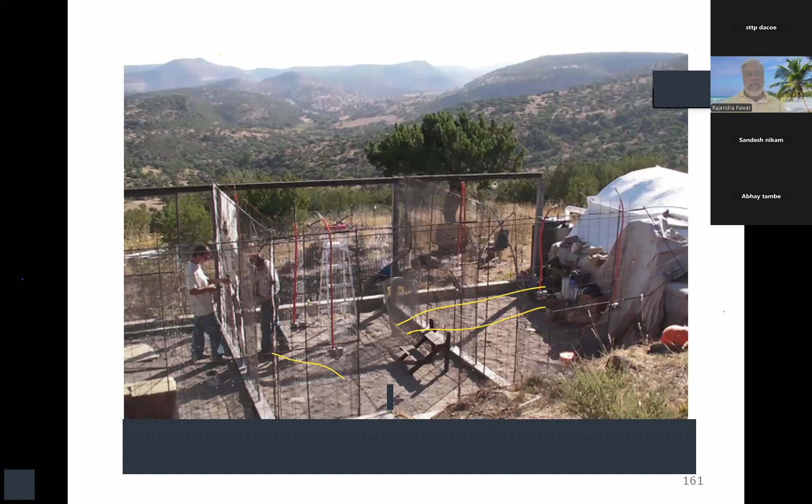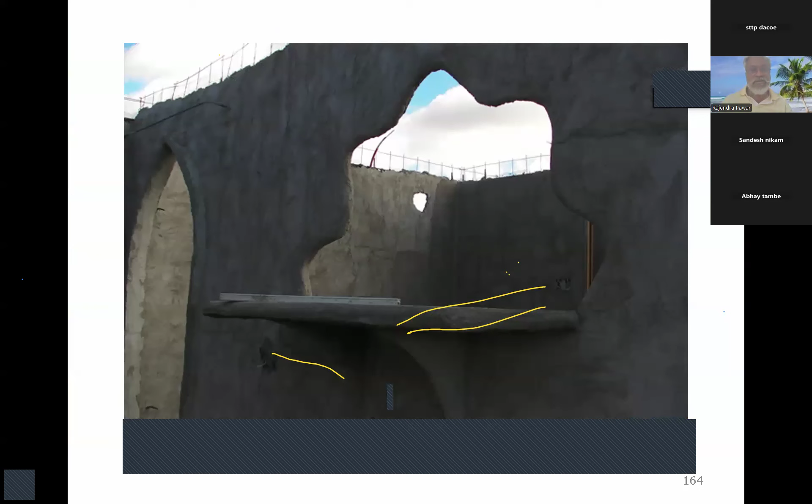Some snaps of the same house, where ready-made doors and windows can also be easily cast and joined with the ferrocement walls along with all fixtures. Electrification, if wanted as concealed wiring, is also possible through ferrocement walls.

This is a hut cast for defense purposes in border areas, which is bulletproof and also shell-proof, even though the thickness here is not more than 2 inches.

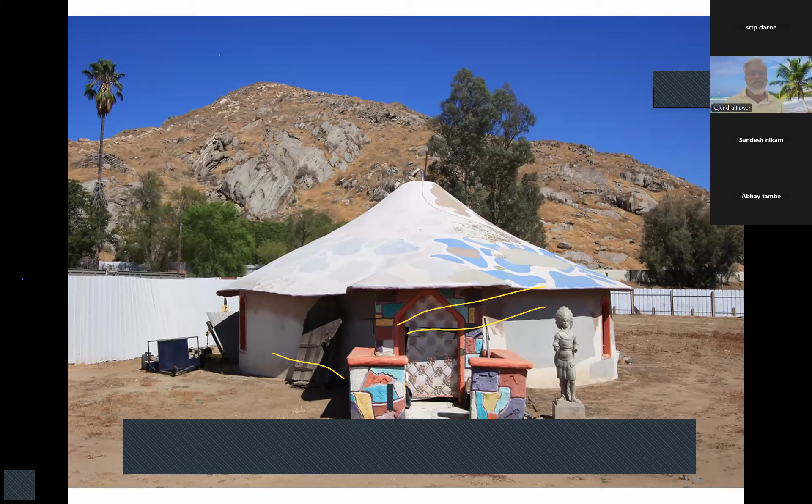These are big industrial buildings cast in ferrocement, some big halls and resorts. Beautiful resorts have been cast using this in Mahabaleshwar and Lonavala areas. Here is a curved wall which is cast over there.

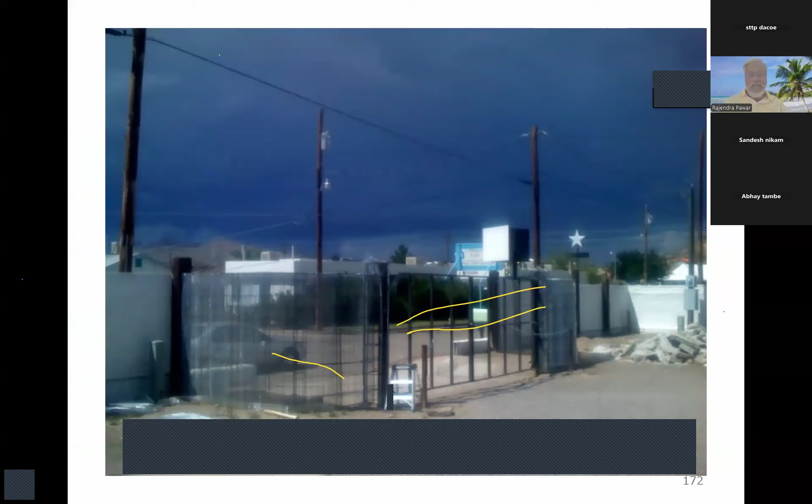The industrial applications - so I think by seeing all these various applications,

You could easily understand the different kind of properties which it possesses as compared to RCC or any other building material. This subject as an elective subject has already been accepted by the University of Pune and even some other universities in Maharashtra, for BE Civil students as well as for post-graduation. Many students are also doing PhDs in this technology.

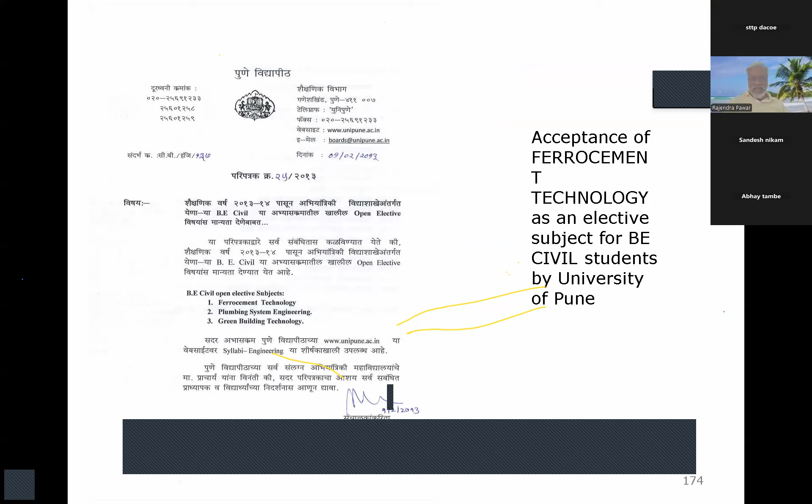This is the circular of Pune University way back in 2013. This subject is being taught and students are interested to learn this not only for academic purpose, but after graduation, certainly for seeking business in this as an entrepreneur. You can work in rural areas, work in urban areas, make these applications, and also develop more innovative ideas by using this technology for various applications.

This was the proposed syllabus for this ferrocement technology. Various international experts who worked in this ferrocement are also there; they have visited our sites in India. Here we have formed one Ferrocement Society of India, which is an NGO, a trust, only for the promotion of this technology. No commercial works are being executed.

We organize various national and international seminars, workshops in engineering colleges, in various halls for the practicing architects, builders, engineers, and recently we have presented our cases in the international conferences of ferrocement, which are held after every 3 years. In 2018, I got the opportunity to attend such international conference in Brazil.

I was invited as a keynote speaker to present before them the ferrocement activities of the development of this technology, particularly in India. And of course, there I got to know that we are leading in this technology worldwide, and there is no limit for the development and doing any kind of business or any kind of structure construction using this.

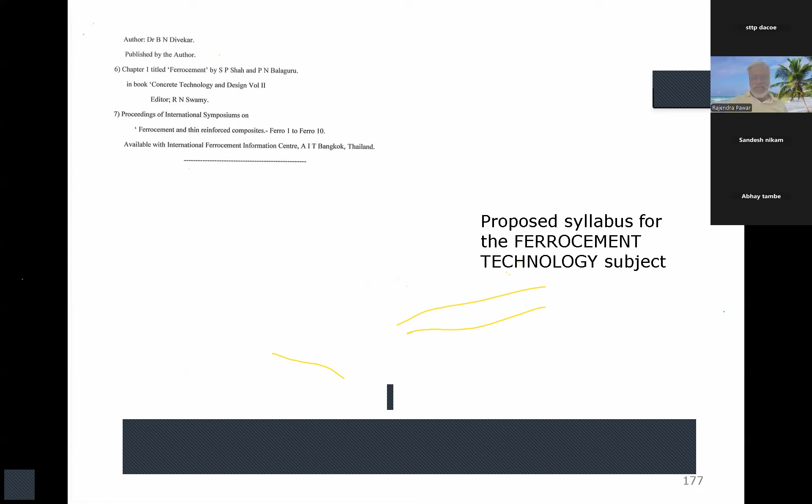I appeal to all the students and faculties to get acquainted with this innovative technology, make use of this technology to apply for the various applications in different sectors, increase the awareness and interest of students to learn this subject. And with this, I hope you understood at least a little bit how unique this technology is and how it is more useful as compared to other techniques.

So I stop here and let the session be open for question answers, or if you are having some queries regarding this. Thank you.